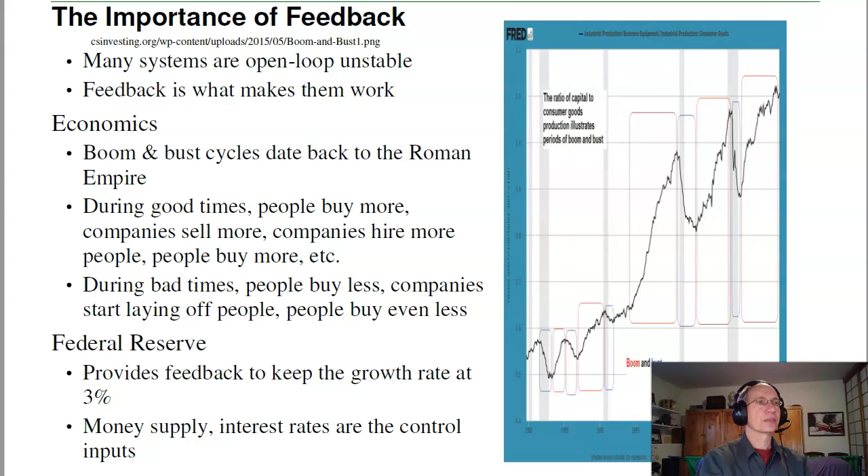Planetary weather is unstable. As the planet cools, you get more snow. Snow reflects more sunlight, cooling it off even further. As it gets even colder, you get even more snow. You have this positive feedback effect. When it gets cold, it gets colder and colder and colder. That can produce a runaway ice age, and that actually did happen about 600 million years ago.

Warming is also unstable. As it starts warming up, the ice starts to melt, and you get exposed water. Water is 80% absorbent. Snow is 95% reflective. As more water gets exposed, that absorbs even more sunlight, which warms up the planet even further, which melts even more snow, and you have runaway warming.

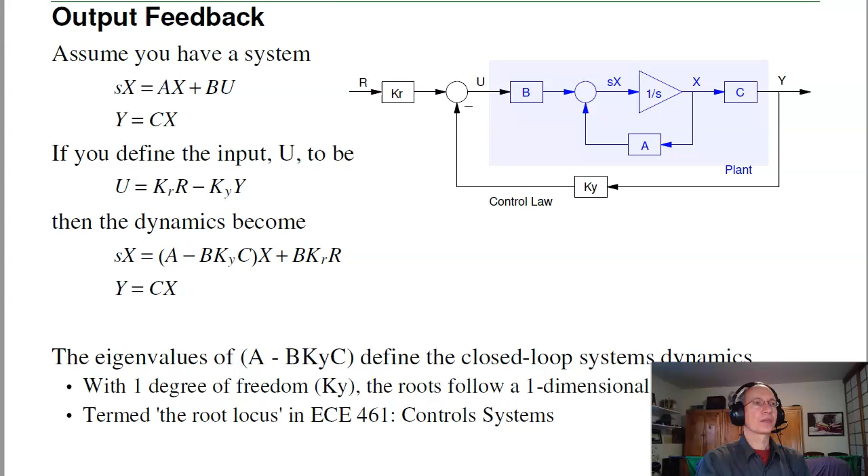You can see that mathematically. If I have a dynamic system in state space, and I make the input a gain times my set point minus gain times the output, this is the closed loop system, A minus B ky C. As ky changes, the eigenvalues change. As the eigenvalues change, the behavior changes. If you want to know what is the optimal gain for y, that's a thing called root locus. That's what we cover in 461 control systems.

As the gain increases, I speed up. Gain increases even further, I start to get overshoot. I start to oscillate. Then I go unstable. That's kind of what you saw when you learned to drive a car. If I jerk the steering wheel too hard, I go unstable and start oscillating. Back off on the gain, I can get a quick response without too much overshoot.

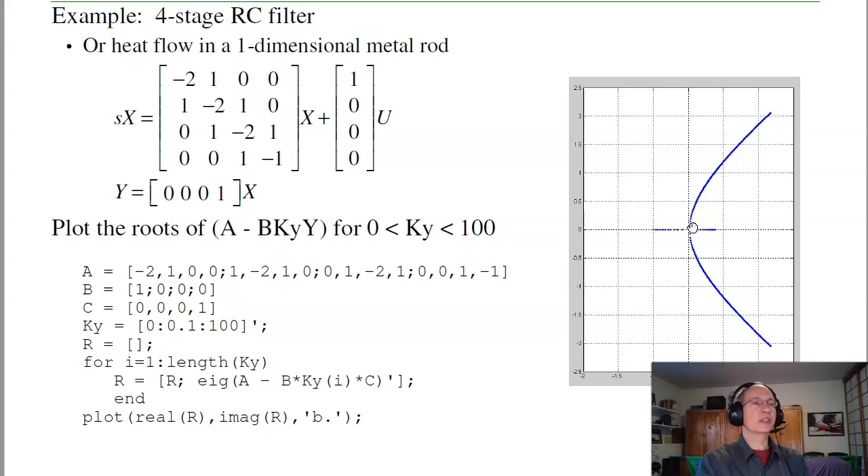And in 461 controls, we do a thing called root locus plots. This is your shopping list. It tells you all the responses that are possible based upon your feedback gain Ky. The optimal gain depends upon your application.

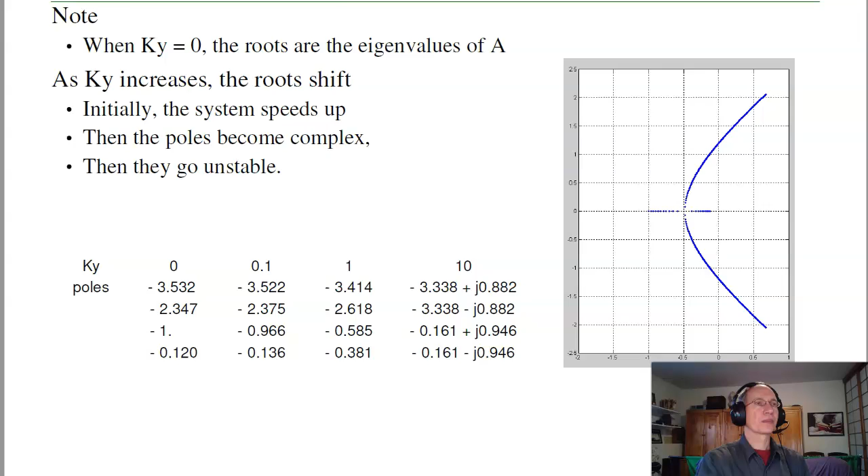If I want a quick system with no overshoot, I'll design for this point right here. If I can tolerate a little bit of overshoot, I might design for this point or up here. Depending upon your requirements, I can define where I want to be, and then the feedback gain that I want is what gain puts you there. And that's kind of what we cover in 461 control systems.

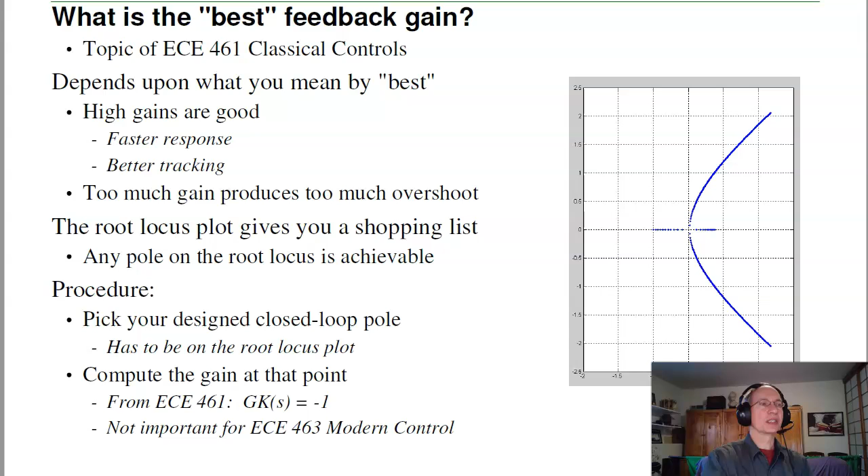Again, with the feedback, I want high gains. High gains give you a quick response, better tracking, but I don't want too much overshoot. So suppose I were to say this is my desired pole location. That tells me the overshoot that I want. What gain puts you there? The approach used in 461 controls is at any point on the root locus, G times K is minus 1, find Ky, and then set the DC gain to 1.

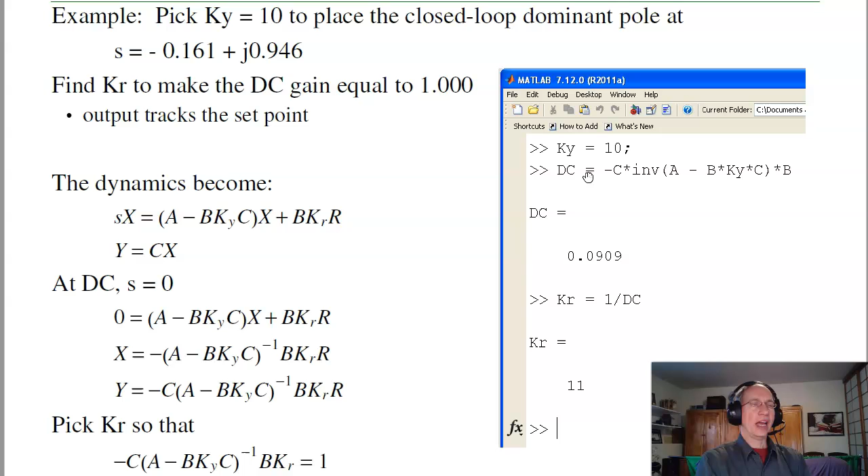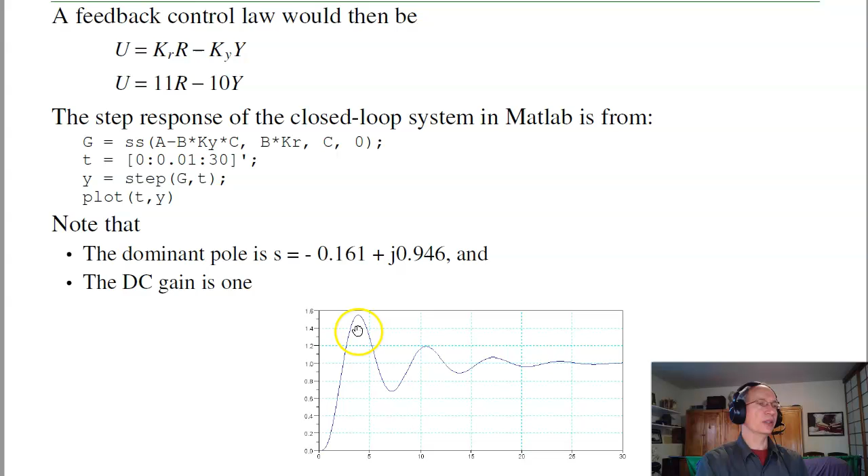What I wind up with is the following step response. The DC gain is 1, so I track the input. I get a little bit of overshoot. Depends upon the system. If I can tolerate, looks like about 55% overshoot, that looks okay. And the trade-off is a high gain gives you quick response. Too much gain gives me too much overshoot. So higher gain than what I used would give me more overshoot than I can tolerate, more than 55%. So again, that's kind of what we did back in 461 controls.

A couple comments on output feedback. With only 1 degree of freedom, the closed loop poles follow a one-dimensional surface. That's the root locus plot. The root locus plot defines what responses are possible by adjusting your one gain, Ky. If you want a better system, or you want to improve the response, then the trick is to add some dynamics to the feedback. I'll add a pre-filter, that's your compensator K of S. Sometimes I'll add a feed-forward controller, F of S. These are things that we cover in 461 control systems.

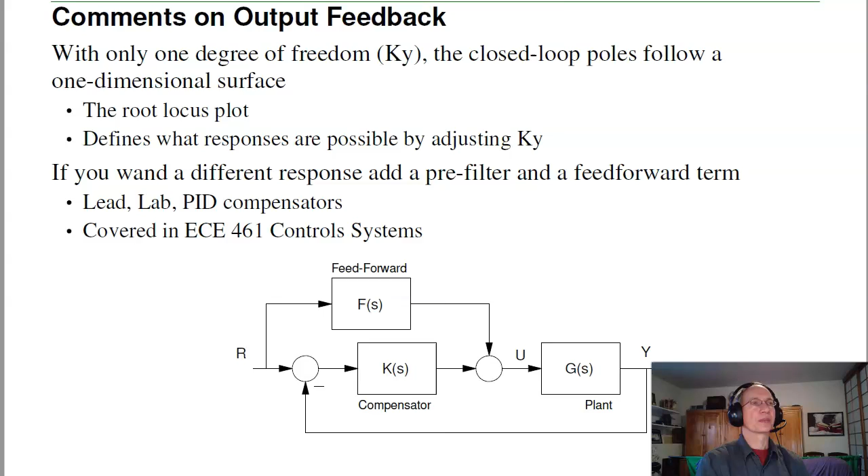A different approach, what we're going to be covering in this class, is full state feedback. Now here's the idea. If I have an nth order system, let's say A is 4th order, I've got 4 eigenvalues. I've got 4 states. If I were to feed back those 4 states, rather than the output, I would have 4 feedback gains to play with. With 4 degrees of freedom, I should be able to place 4 poles anywhere I want. It's basically 4 equations, 4 unknowns.

If I can place them anywhere I want, I can sit there and specify where all 4 poles go. I'm no longer stuck on a one-dimensional surface like a root locus plot. I get any response I want. That gives me complete freedom, and again, likewise, I don't care. Is the open loop system stable, unstable, has to behave? I can do anything. That's the approach we'll be using in this class. Kx places all the poles of the closed loop system, and Kr fixes the DC gain. Usually makes the DC gain 1, so I track my set point.

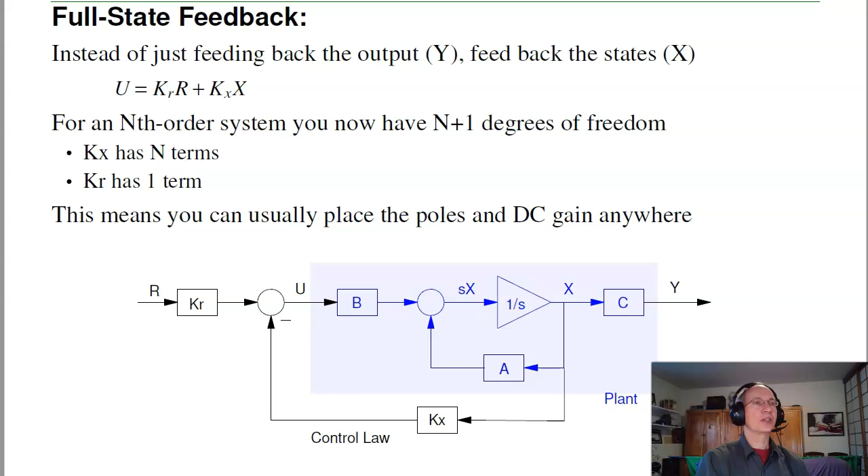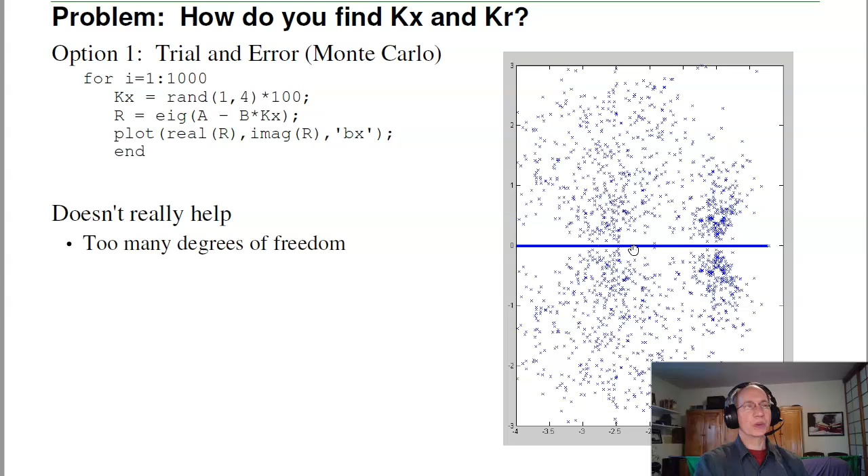The problem, however, is how do I find Kx? What we did before is to find my gain Ky, I just let Ky sweep from 0 to 100, plot the resulting roots, and I get a nice one-dimensional surface. If I do the same thing here, I've got 4 gains to play with. If I just guess random numbers and plot them, I can put the poles pretty much anywhere I want. So that doesn't really help. I've got too many degrees of freedom. I need a better tool.

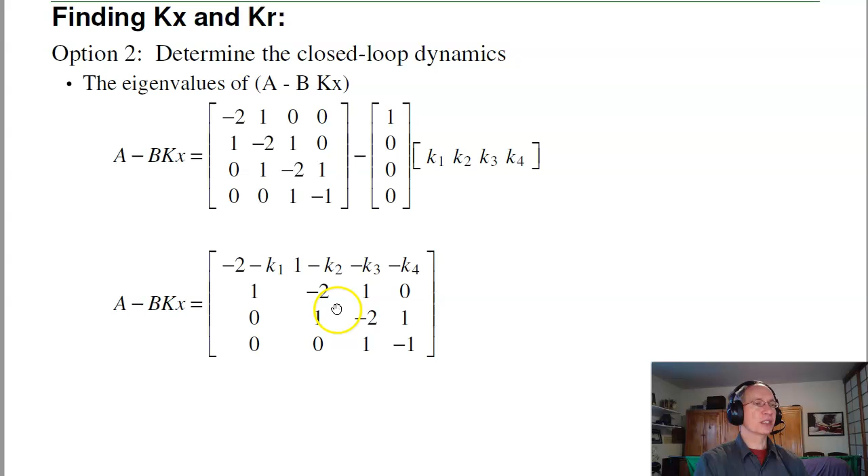A second way to find Kx. The eigenvalues of the closed loop system are those of A minus BKx. So here's my A matrix, there's my B matrix. I've got 4 gains. Pick these 4 gains to place the 4 poles. So when I do that, here's my new closed loop system, A minus BKx. The eigenvalues are the roots to the determinant of sI minus A. So take sI, s times identity matrix, minus your A matrix. I get this. Now find the determinant.

What you're going to get is a 4th order polynomial. That's a function of K1, K2, K3, K4. Pick those gains to put the roots where you want. This method really bogs down when you get past 2nd order. There really has to be a better way. And there is, so stay tuned, we'll be covering that.

In order to do that, however, a system must be controllable. With full state feedback, you've got n equations, meaning n eigenvalues to place, with n degrees of freedom, your gains in kx. What we want to do is place all n eigenvalues anywhere I want. And the question then is, can you do it? Can I place all n eigenvalues anywhere I want? Or is there a solution for kx given the desired closed loop eigenvalues? And the answer is sometimes yes, sometimes no.

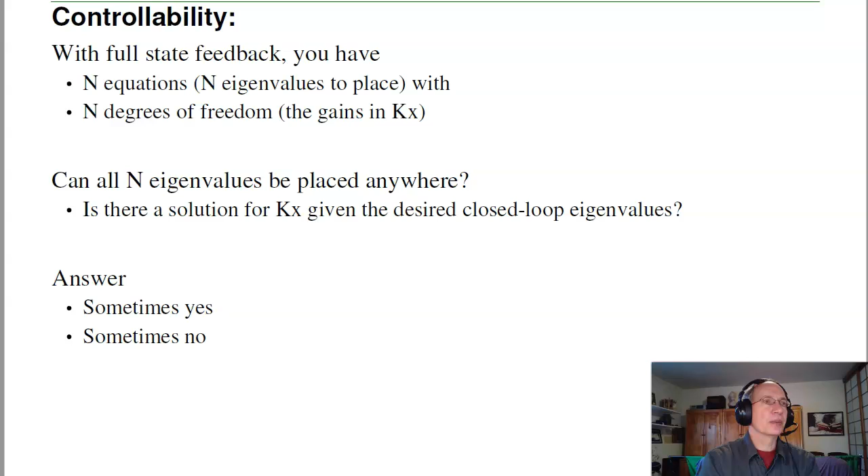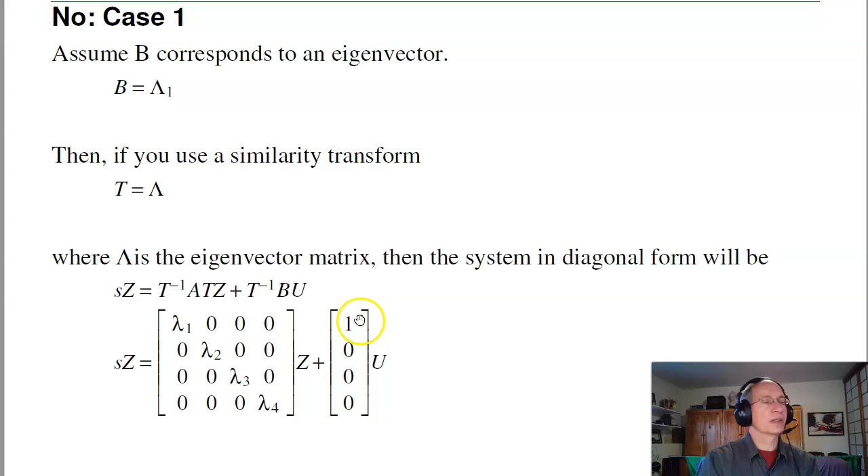To see when that happens, let's consider a couple cases. First, let's assume B corresponds to an eigenvector. Then if I do a change in variable, where T is the eigenvector matrix, I wind up in diagonal form. And my B matrix will just be 1, that's the eigenvector I'm exciting. Now let's do full state feedback. If I feedback the gains, I wind up with this for my closed loop system.

This is upper triangular. A property of upper triangular matrices is the eigenvalues are the diagonal. So the one eigenvalue I can shift, the other 3 are fixed. If they're fixed, I can't put them anywhere I want. So this system doesn't work. And from before, if B is an eigenvector, it's not controllable.

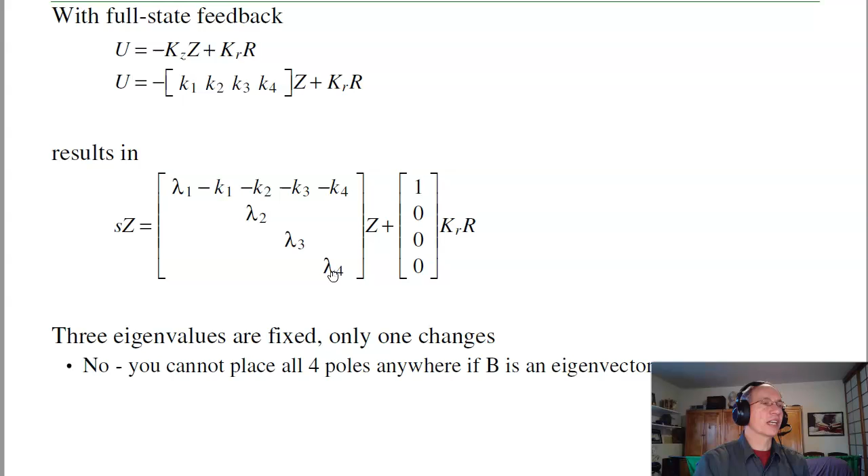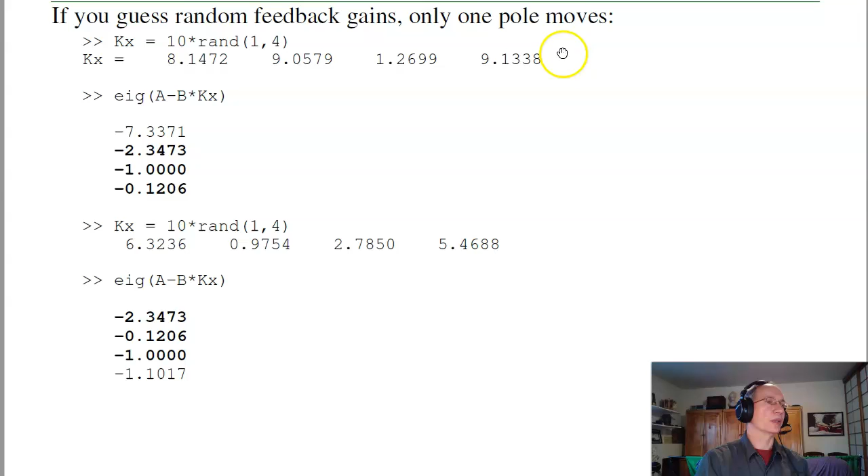Case number 2. Suppose B contains 3 eigenvectors. In that case, when I go to Jordan form, I'll have a diagonal matrix for A, kind of by definition of Jordan form. My B matrix will have 3 terms, since I have 3 eigenvectors. The fourth one will be 0. Now let's use full state feedback. In this case, that fourth mode is not going to shift. Again, it's not controllable. That kind of tells you that to be able to place the poles anywhere I want, B has to contain all 4 eigenvectors, which from the PBH test means the system has to be controllable.

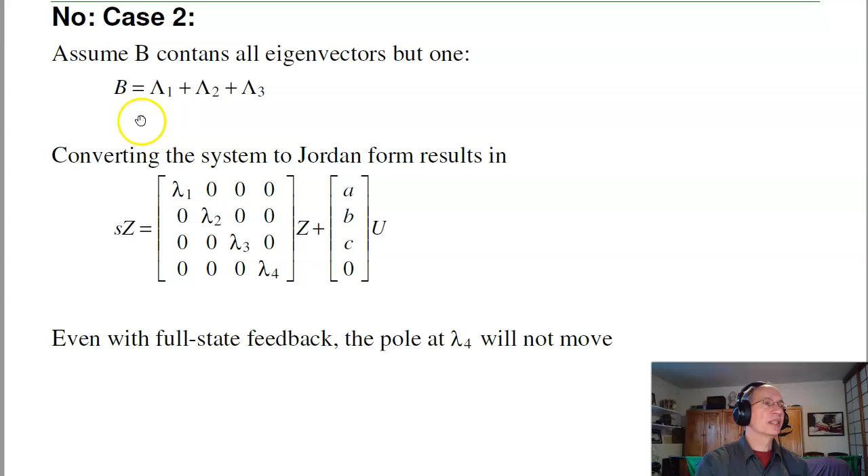So that's the answer to the first question. When can I place the poles anywhere I want? And the answer is when the system is controllable. The second question is, okay, assume the system is controllable. How do I find the feedback gains? Well, that's a little bit harder. That'll be tomorrow's lecture.

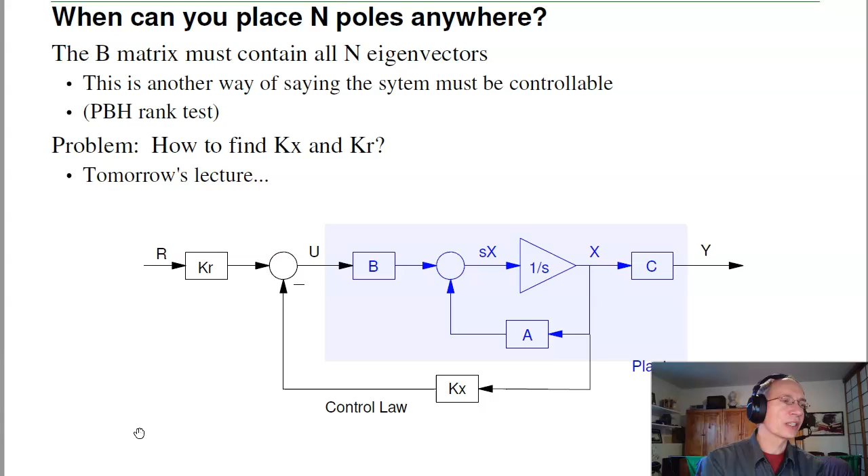But in summary, feedback is all important. With feedback, you can take systems which are open loop unstable and make them stable. Stable is important. If it's unstable, you do things like you fall over, it blows up, stuff breaks. You got to be stable to be useful. Feedback allows you to improve the response of a system. Even if you're open loop stable, you can improve it with feedback.

For example, a soldering iron. If you apply a fixed temperature at the base, it's going to take a long time for that heat to propagate down the bar. With feedback, I can crank up the heat, get it to warm up, and then drop it down, so I get a much quicker response time. It's what you do with your car. When the light turns green, you floor it, and then back off. That feedback improves the response of a car so that rather than very slowly getting up to 35 miles an hour, you can get there much quicker.

Feedback also allows you to track a set point, such as your car. If you want to go 55 miles an hour, your cruise control can get you there. With a soldering iron, I set the tip temperature to 650 degrees. It'll get there. The following lectures will look at how do you determine the feedback gains to meet those requirements.

So that's lecture number 12 for ECE 463 Modern Control. Feedback.